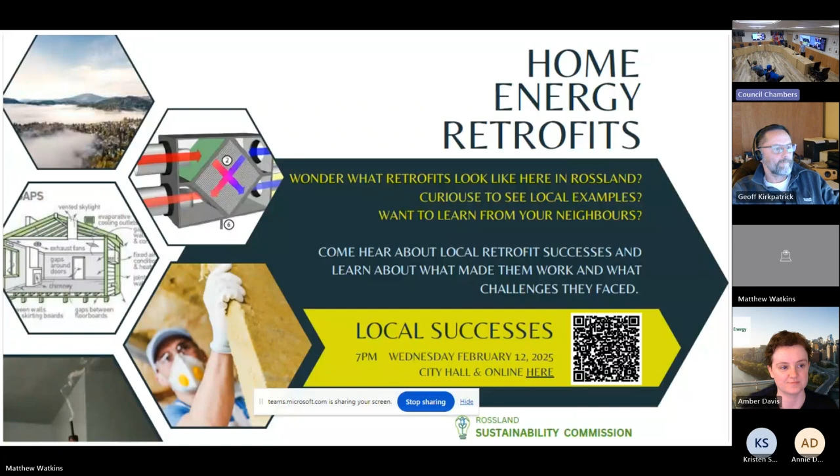I just wanted to acknowledge that we're holding tonight's event on the unceded territories of the Sinixt people. This is something I did recently, a Coursera course called Indigenous Canada. I think it's like an 8-hour course, with a bunch of videos and reading content. I found it a great way to familiarize myself with the issues and help me be a better citizen towards reconciliation. So something to consider if you have some time.

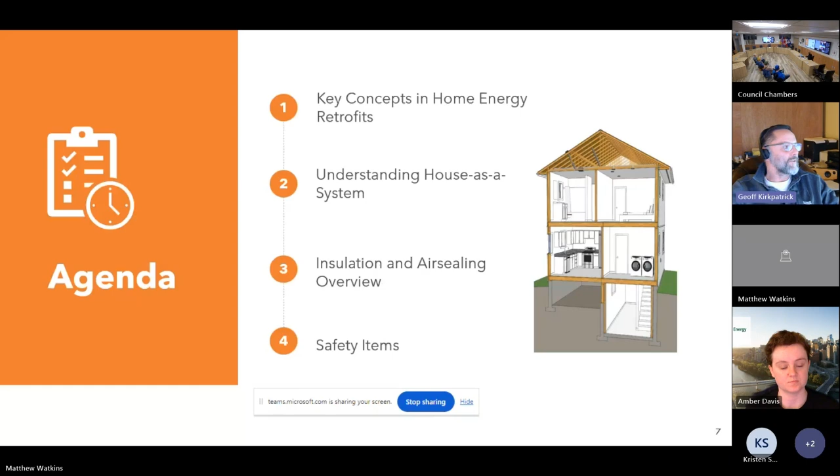So just a recap on Red's previous presentations, and the importance of the concepts of home energy retrofit. The initiatives would be making the home more thermally efficient and airtight, reducing energy consumption and cost, improving thermal comfort and indoor air quality, and avoiding issues due to retrofits that don't utilize the house as a system. The goal is to improve durability, comfort, and life cost performance. This can be a very sensitive aspect when dealing with a residential home and making adjustments. Rossland has a unique diversity in home construction and timeline, which creates quite a number of complex considerations when looking at the entirety of the envelope of the environmental separation.

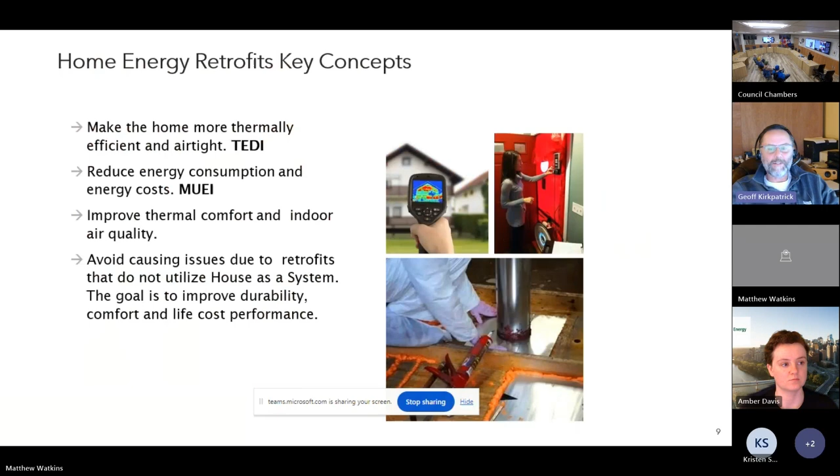I'm just going to cover quickly some of the terminology we're referring to tonight. Building envelope, which is environmental separation, the parts of the building that separate inside conditioned space from outdoor space. That is the critical envelope, and we look at that as a six-sided box. Thermal insulation and R value are materials that resist heat flow, therefore insulating the building, typically measured in R value, with a higher R value meaning more insulation. We're going to delve into that a little bit more.

Air leakage is the uncontrolled airflow through the building envelope through cracks and unintended openings, which is not your known vents, such as dryer, bathroom vents, range fans. Air tightness and air barrier are a combination of materials and components that together control airflow through the building envelope, and I'm going to touch on that in a little more detail. Air sealing, which we've had lots of experience with, is products, tools, and labor intended to reduce air leakage through the building envelope and improve air tightness, air barrier, which is a critical function of our envelope.

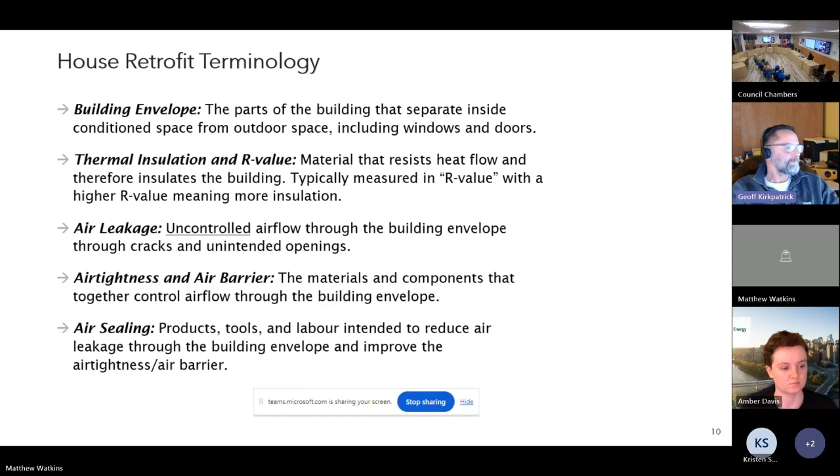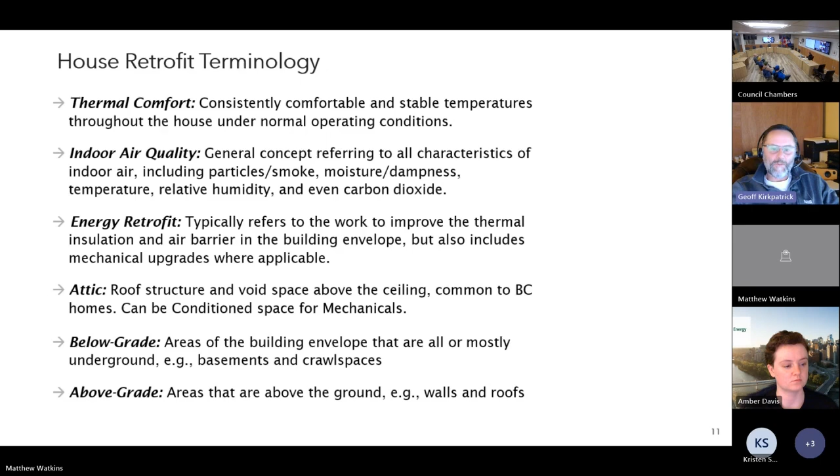Thermal comfort: consistently comfortable and stable temperatures throughout the house under normal operating conditions. Indoor air quality, which for me is a major subject for anybody in an enclosure in a conditioned space. Energy retrofit typically refers to the work to improve the thermal insulation and air barrier in the building envelope, but also includes mechanical upgrades where applicable. An attic is a roof structure and void space above the ceiling, common to BC homes, and can be a conditioned space for mechanicals. This is a critical option in upgrading our homes, that we can convert those areas to conditioned space. Below grade are the areas of the building that are mostly underground, examples are basements and crawl spaces. Above grade are areas above the ground, examples are walls and roofs.

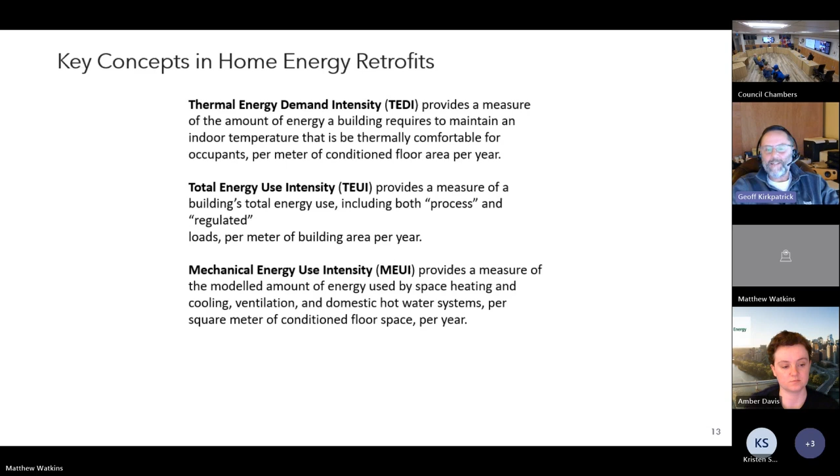So the building envelope, I'm sure we've covered this many times over, but it's really critical. I cover this daily in every interview I go to, and what's caught my attention is how much I have to rehash this information with contractors. All windows, walls, and foundations require the 5 critical barriers.

The primary barriers we're concerned with right now are my air and thermal insulation—those are my TEDI values. In this diagram we're looking at, we can see a standard, say, 2x4 wall cavity. My drywall layer is on the inside. My air barrier and my vapor retarder are one and the same—that is the poly behind the walls.

Now, this would represent a 70s or even 80s building and newer. So anything pre-80s is not going to have an effective air and vapor barrier. That's just the nature of our build process. Anything pre-50s is going to be even less critical in its barriers, and pre-40s, which is pre-building code, is just the Wild West in building enclosure.

But if we want to look at indoor air quality, comfort, and conditioning, all walls for durability require the 5 critical barriers. The water shedding surface is your cladding assembly, meant to keep 90% of the water out of the walls. Your water resistant barrier is the layer of membrane behind that—in an older home that might be felt paper, in a newer home, polyolefin construction wrap—meant to be your final plane of protection against ingress from environmental loads, the outside conditions.

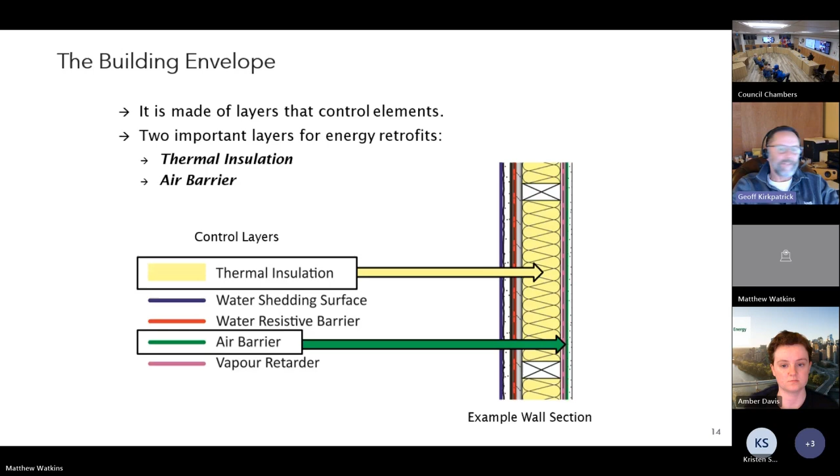To make the house more thermally efficient, our typical scenario would be a high percentage of air leakage and inefficient heating and cooling, so I need a large mechanical means to compensate for the amount of air leakage and the low thermal performance value of my wall assembly. An improved scenario means reducing the ACH, or air changes per hour, and adding insulation where possible.

And I'm reducing that mechanical needs to some degree. An excellent envelope is a good air barrier and extra insulation, which I always refer to as the sweater and windbreaker. Everything in nature puts the control layers on the outside. You and I got up this morning, put our control layers on the outside, and we go outside. We put the sweater and windbreaker on to protect ourselves. Well, our buildings can respond from the same treatment with excellent results.

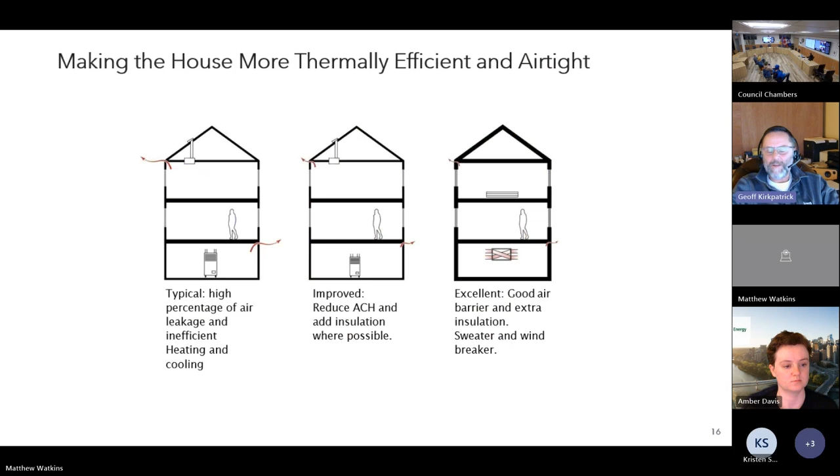So in this case, I've reduced my air leakage. I've reduced my conductive loss. I have very small mechanical needs, and I have an HRV to give me my fresh air resources for indoor air quality.

So air leakage is important in both seasons. We're losing heat energy through our homes through radiative, convective, and conduction. The conductive losses throughout the home are quite prevalent. I can see that clearly when I go into a home with the thermal camera, and I can see all your stud and framing work. That's a conductive loss. Convective loss is all the air leakage in through the top plates, sill plates, penetrations around the building enclosure, and the radiative through window openings.

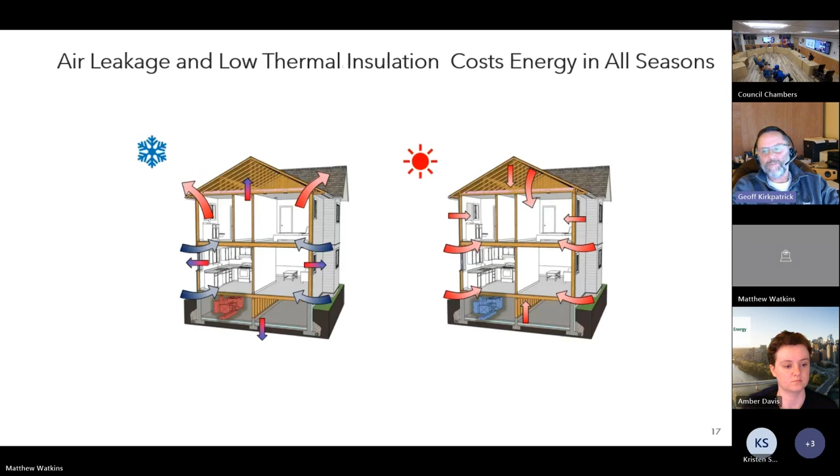The same conditioning is happening in the summertime. We require that durable thermal envelope in order to protect us from overheating in the summertime.

So just for those that don't know, measuring air tightness is done with the blower door. A quantitative air tightness measurement is a useful starting point to get a number in ACH, changes per hour. It's utilized by a calibrated blower door fan, which is used to pressurize or depressurize the building and measure the air tightness.

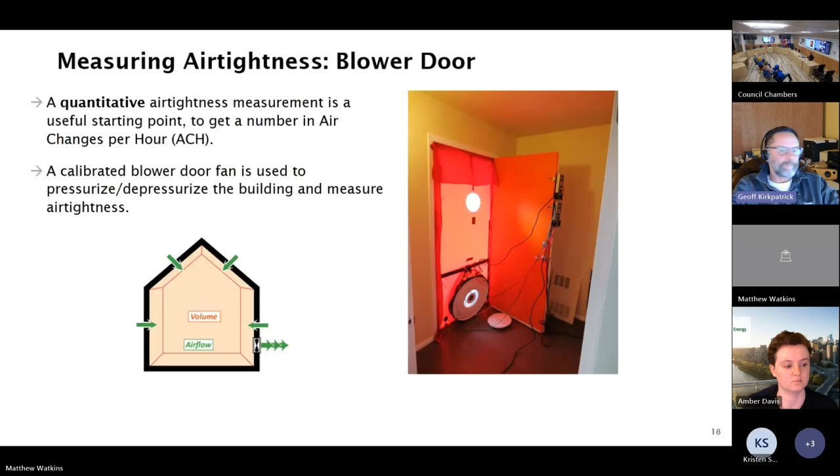So the ACH number indicates the volume of air that can be blown through the envelope under standard test conditions. The high test point that we start at is negative 50 pascals, which would be the equivalent of a 40-kilometer wind blowing on the building. So on the face that is windward to the wind, it's going to pressurize that side of the building, but as the wind eddies over the building, it's going to depressurize the opposite side.

So a 10 ACH building, let's say I have 20,000 cubic feet of interior volume of space. At a 40-kilometer wind event, that means I'm trying to condition or maintain the conditioning of 200,000 cubic feet of air per hour. So for ACH, lower is better. If we can lower our ACH rating, we're reducing that amount of required conditioning, or the BTU energy to maintain the conditioning within that space.

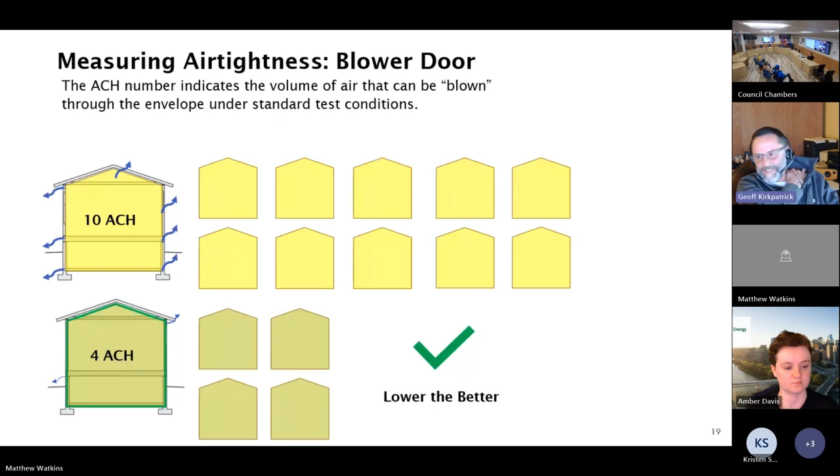Now, it's important to note that two houses side by side with the same ACH rating are not comparative values. It is a relationship between volume. So if you have two houses side by side and you're comparing ACH values, and it's a 2,000 square foot footprint versus a 3,000 square foot footprint, they are not the same ratio of number. It's in relationship to the volume of the space.

So here, before work begins, the house is a system. This is now the critical part of the conversation. By default, older homes may not be very energy efficient, but they usually have built-in risk mitigation. So all of our existing stock homes, a 2x4 or 2x6 standard infill insulated framed wall, has high potential for condensation on the sheathing plane throughout the winter months.

So any air leakage, a pressure differential between interior and exterior, the laws of physics state that pressure wants to equate and temperature wants to equate. So we always have a little bit more pressure on the inside opposed to outside. Air pressure is always looking for those openings.

We hyper-focus on the vapor barrier, but the vapor barrier is a function of coverage. The air barrier is a function of continuity. So if I don't have that continuity in an air barrier plane, whether that's the airtight drywall or through control layers within the wall assembly, I now have a high potential at all those leak locations for wetting or even frosting, generally frosting in our environment here in the Kootenays, within our wall assemblies.

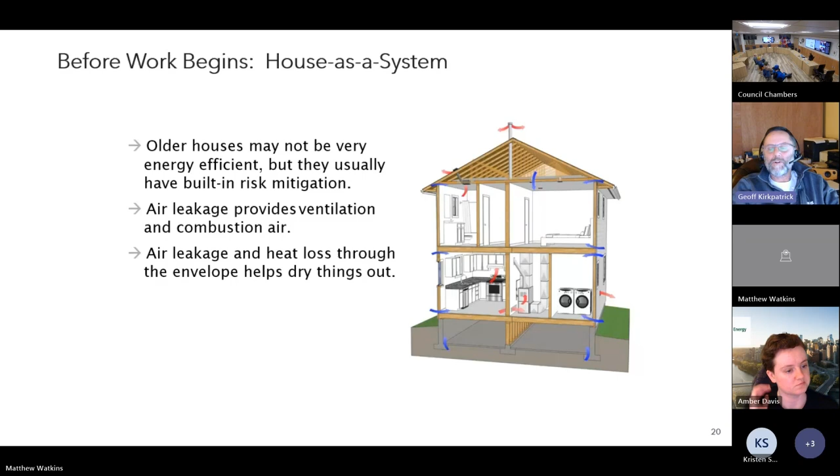Everything should be considered during retrofit work. We want to have good data to base it on. I want to make sure my foundation's stable, worthy of investing the time and money and effort in, which is the structure. I want to make sure the mechanical equipment, the electrical, is it going to meet my needs? If I do make changes to the building, is mechanical going to happen first or second?

And occupants and operation. I see a dramatic change in the operation of a building depending on occupant loading. If we go from an older couple that sold off the home and a young couple moves in with a couple of kids, and we change that occupant load behaviors, it has a dramatic effect on the interior conditioning environment. Energy upgrades do not occur in isolation and may affect several building components, and if not planned well, they can lead to issues in the house.

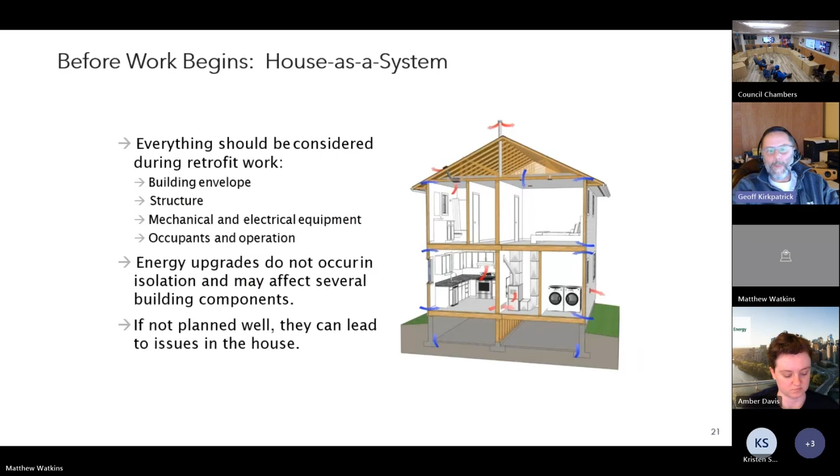And combustion spillage. So again, we're in these homes where by default we had been using a considerable amount of fossil fuel energy or combustion appliances, and we start trying to air seal and reduce the ACH metric. We have a condition that creates that combustion spillage where we create draw to the inside of the building. Air sealing can lead to poor air quality if good home ventilation is not provided, and improper retrofit work can trap moisture and potentially degrade the structure.

A scenario I've recently had was a replacement of all new windows, and those windows, as we can see in that photo in the bottom, started condensating quite excessively. The homeowner assumed that there was something wrong with the window installation, and upon review, the mechanical hadn't hooked up the fresh air return to the furnace, which was just recirculating the interior air and getting excessively high condensation rates within the building. So their RH was well over 70%.

It crept up on them unbeknownst, and that was the issue: now my dew point is so high at 70% and 20 degrees. My dew point is like 15 degrees, so it's gonna condensate on the lowest R value component within that wall assembly. So something as simple as a mechanical not being properly installed was enough to cause condensation in a newer home.

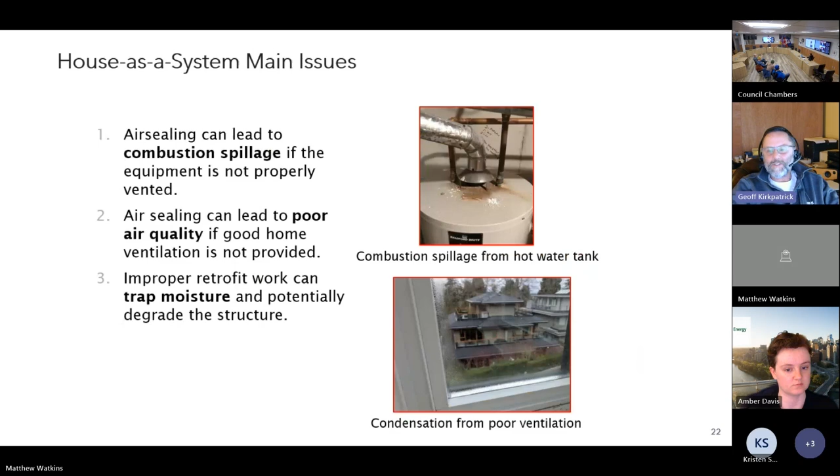So just a visual aspect to show that in an existing building, air leakage provides a lot of that combustion air. And as somebody who goes around with a thermal camera and has reviewed everything from an 1870s building to a 2025 building, we can visibly see these locations of air leakage. So anything pre-70s, you're going to have a fairly high ACH rating, and most of that fresh air that you're consuming on the inside of the building is actually coming through the walls.

In wintertime conditions, when all the windows and doors are closed, your fresh air intake without dedicated intake is coming through your walls and gaps at foundation to floor or ceiling plane. So in this case, we've existed in that natural balance: the building's leaky enough, there's enough air coming and going through the envelope that I'm not at risk of combustion spillage.

But as we move to the right with a little bit of air sealing, I'm going to have a potential that when I run the exfiltration components, my bath fans, range fans, and dryer is a big one, sucks a lot of air out of the space. If my envelope is more efficiently sealed, there's a probability of drawing that combustion gas back into the space. So one of the more typical is your gas hot water tank.

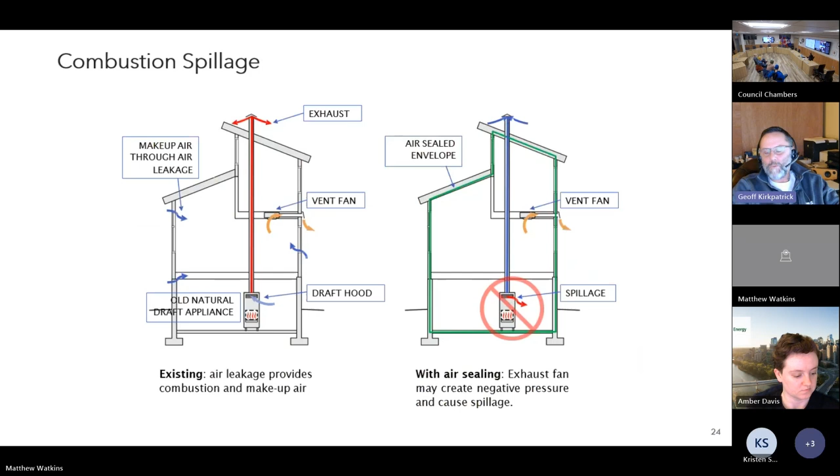And if you look on the top, there's a raised hood above the combustion exhaust. And that is an area where if you were to turn on all of those components at once, if you had people occupying the bathrooms with the bath fans on and the dryer was on and the range fan was on all at the same time, and I can raise the interior pressure differential by more than 5 pascals, I'm at a risk of combustion spillage.

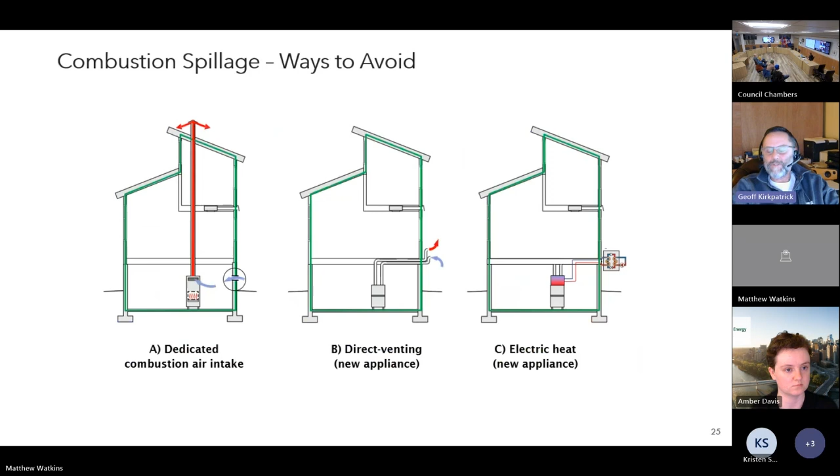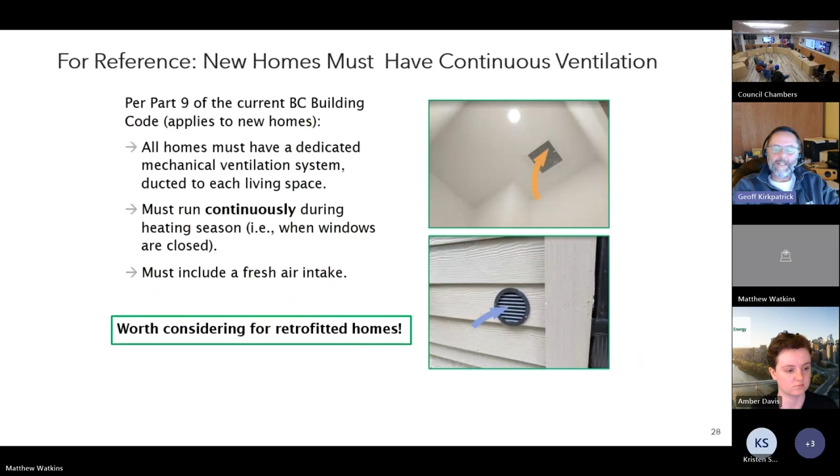It's definitely worth considering for retrofit homes. So this is an example we're going to run through of average R value. It's a critical exercise in understanding the changes we make to the building and the potential offsetting of costs, but also the effectiveness of those opportunities.

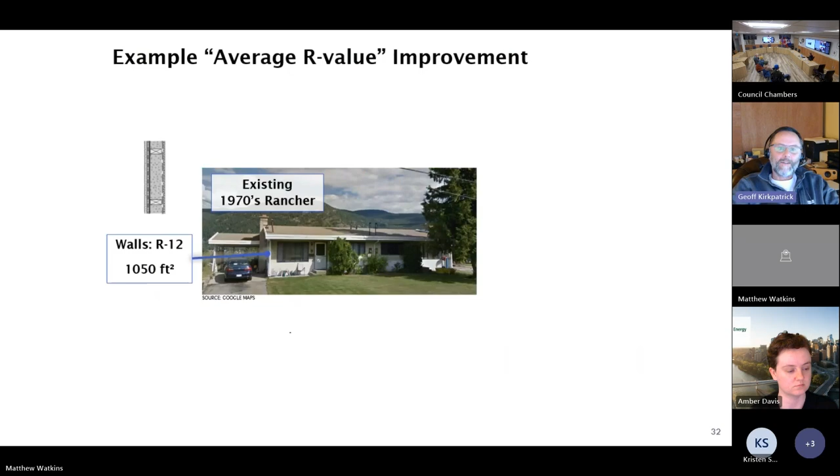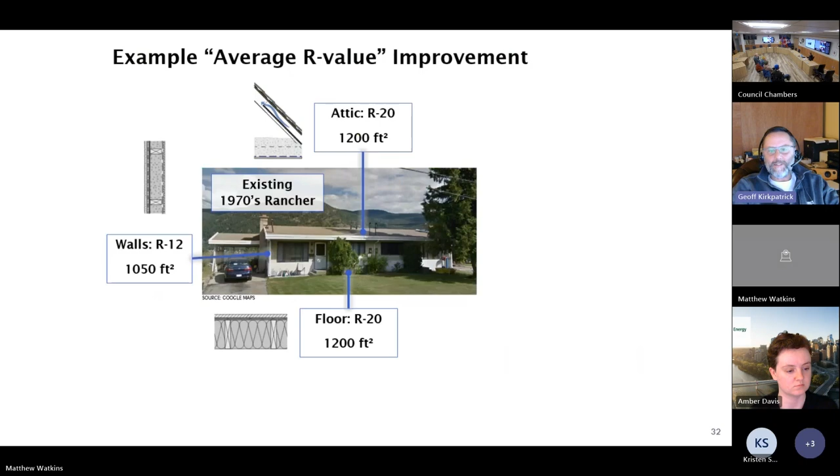The example here is an existing 1970s rancher. My walls are an R12 kraft batt, with 1,050 square feet of exterior wall. Our attics are R20 at about 1,200 square feet. My floor is R20 over crawl space at the same 1,200 square feet. And my windows are single glazed aluminum framed, with an R1 being generous in this case, occupying 125 square feet of that exterior envelope.

So my average weighted R value for that envelope is 10.8. This is referred to as your UA, or your U value over your envelope, as an average weighted value. Obviously my windows are a different R value than my walls. So if I take all of those components together, the window-to-wall ratio, the wall component, the R value of the wall, I get a UA value in this case of R10.8.

The windows make up 3% of that envelope, but because of their low R value, they make up 38% of the heat flow through that envelope.

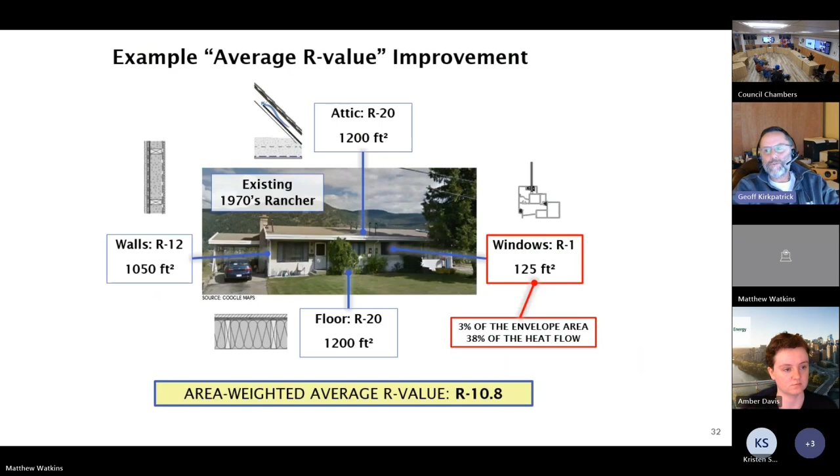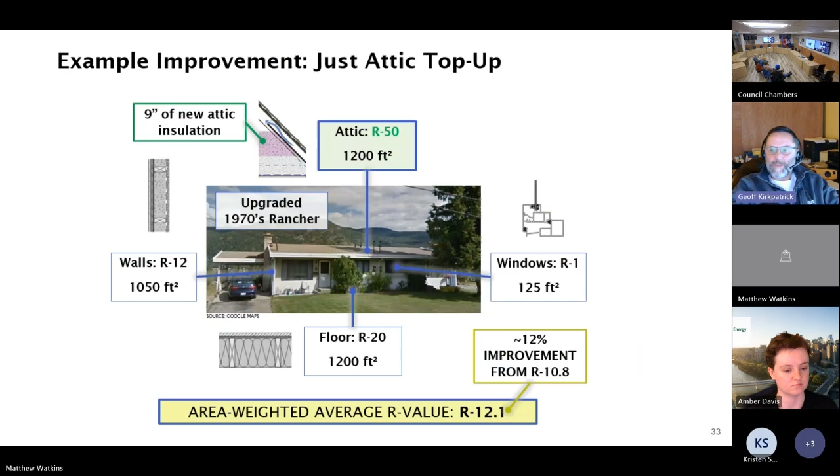So if I was to add 9 inches of new attic insulation, turning my attic to R50, that gives me a 12% improvement of the overall R value of the building, to R12.

If I upgrade my windows to an R4 Energy Star standard window, that gives me a 39% improvement, to R15 for the UA value of the envelope.

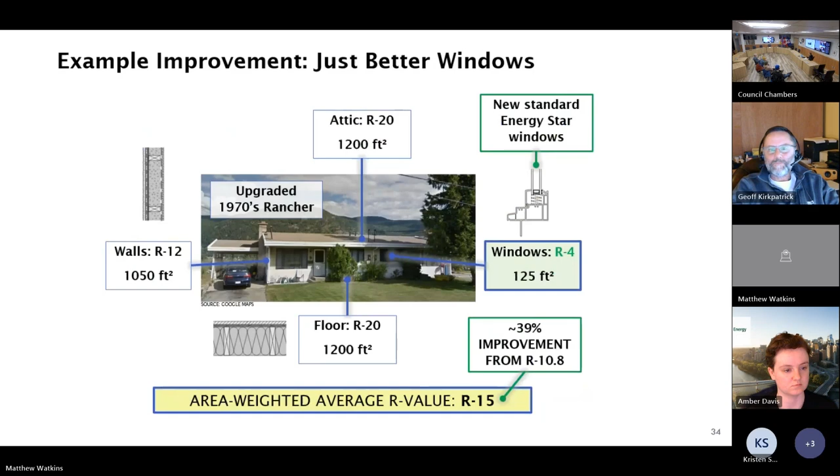Now, if I just put in 6 inches of new attic insulation at R40 and the new windows, I get a 58% improvement from my previous R10 to R17. Not bad value if I need to get the place to a comfortable space. This is the first step in upgrading that envelope.

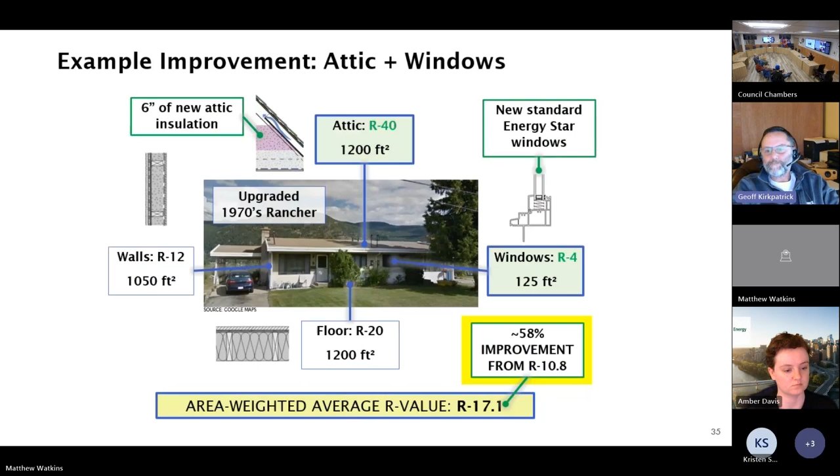So adding insulation to an opaque assembly, even R30 of new insulation, had a relatively small impact at 12%, but improving the windows from R1 standard to R4 had a significant impact on the average R. Combining upgrades, even with less attic insulation, had the biggest impact at 58%. And the concept applies to all assemblies, combinations of envelope improvements.

Windows and doors are always a good starting point if possible, and upgrading them provides other value like comfort and air tightness. Talk to Amber, you can learn more.

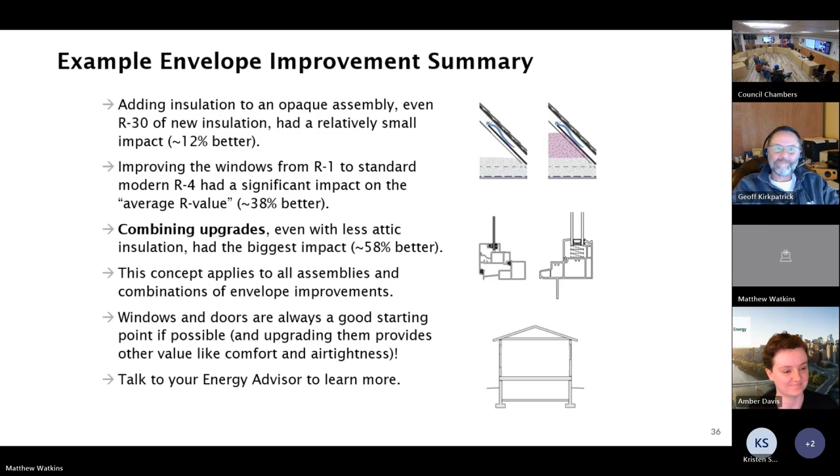So here's some current scenarios that I'm seeing, and I'll leave some room for Amber to talk about success stories. Unfortunately, with our current state at the contractor level, we have some great contractors and we have a pool of less experienced or less capable contractors. We're going to get that in any marketplace. It's critical to understand the function of your specific product and being able to navigate the upgrades effectively.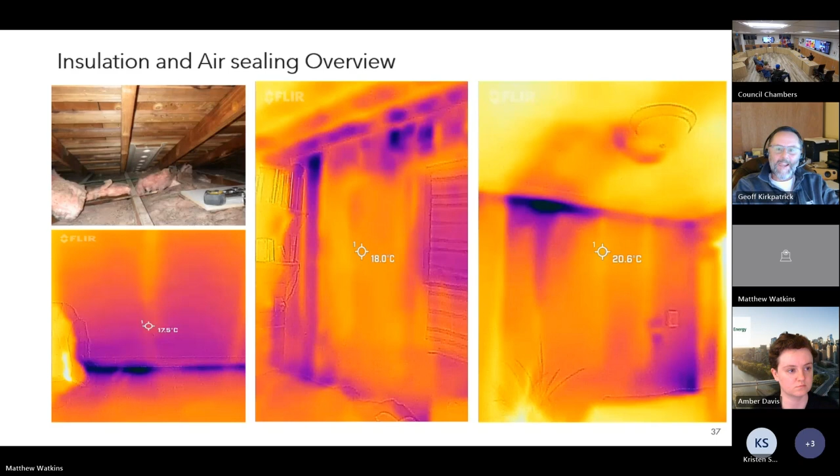So we can see here on the left another case scenario, which I think is very interesting and important to highlight: in the top left, just beside the focal point, is an interior beam where a wall was removed, but I have air leakage from the exterior wall into that beam channel. That means air can now track through my interior walls, which makes it very difficult to complete an interior air barrier approach referred to as an airtight drywall approach, with drywall being the most consistent finish within the home.

So I can utilize that consistent plane by finishing it out and sealing penetrations, sealing the drywall to the floors, ensuring that it's sealed to the window and door penetrations, and pick up some air tightness metrics based on the airtight drywall approach. But unfortunately, I have no control of the air that's moving through all my intermediate walls within the building.

Another one here on the right, which is not as uncommon as I expected: this is wood fiber infill insulation left over from the mills, so you barely have an R4 ceiling plane. This is a current condition in areas like Rossland, where we have historically poor building practices. Our needs weren't as critical as they are in today's environment, so this was a normal, acceptable practice.

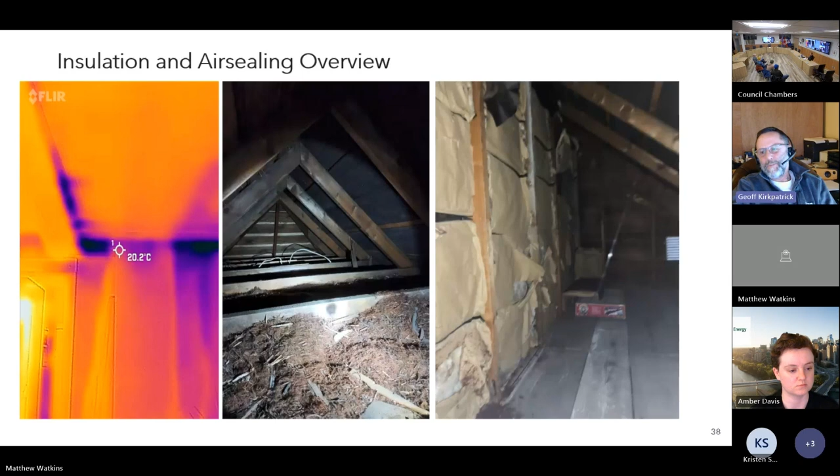Go ahead, Brad. So this is too fast.

Thanks, Brad. On the left is a newly installed Energy Star door, not tied into the critical barriers of the building. This is going to be the big theme for me: the critical continuity of that air barrier assembly. If I don't have an air barrier assembly, it is mandated - CSA A440, BC Building Code, Best Practices Guide - and it's repeatedly highlighted in the HPCN contractor vetting process that you must maintain contact with the critical barriers. If there are no critical barriers within the wall assembly, such as in an older home with no poly or no water resistant barrier on the outside, you are to install the window so that you can tie into those critical barriers if subsequent work was to be done. This is the requirement of a contractor to install to CSA A440 standards.

In this case, here's a new Energy Star door that is simply spray foamed into the opening, and I've got tons of air leakage around the frame - not the hardware or door itself. This is outside of the frame-to-jamb tie-in, which was just done with spray foam. Spray foam is not a continuity tie-in between components.

I'll just dive into that one a little bit. Spray foam itself has a long-term thermal resistance loss value - it doesn't maintain its R-value over time. It also doesn't rack with the building.

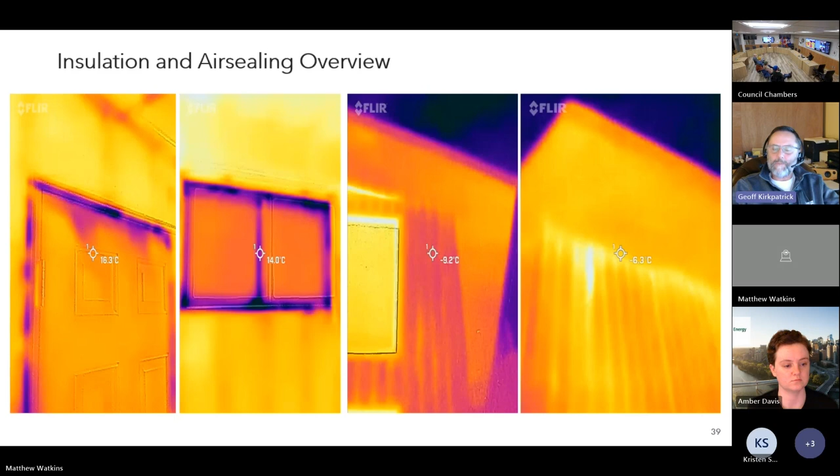It is currently at 1.75 for this space, and I'm planning to go beyond passive levels if I can, reducing my air change rate metric to about 0.5 air changes or less. I've built in the past to 0.012 air changes, where the only heat source was recovery through a heat recovery ventilator from the battery storage room for the solar on a remote cabin. That was the only heating source in the middle of winter for that building. So dramatic effects can be made with the envelope-first approach.

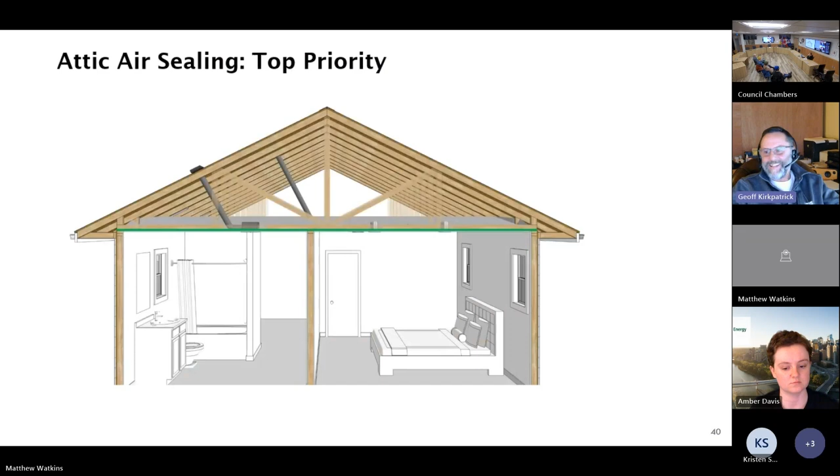We can see from this plan that we have a ton of penetrations within our ceiling plane. We have duct chases, bathroom fans, range fans, pot lights, and lots of penetrations within our framing assembly as well, including wire chases and plumbing chases going down through common wet walls and electrical feed walls from your panel all the way to the second or third story. So there are lots of opportunities in the ceiling plane, which is sort of the final cap.

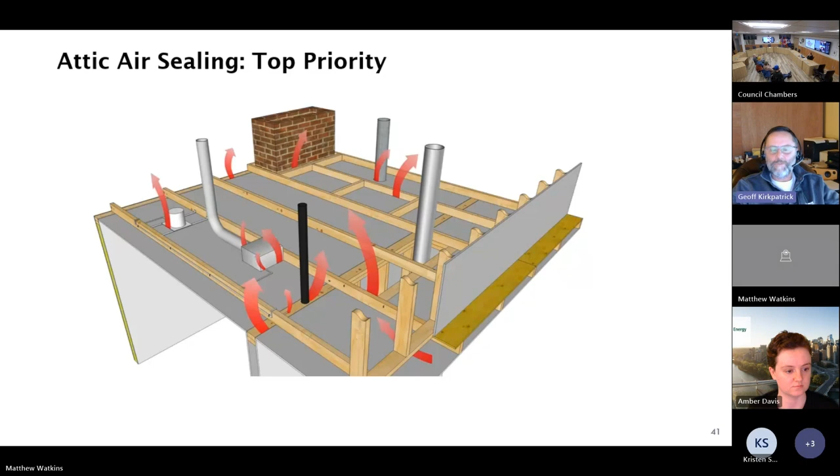If I can get that ceiling plane air sealed, in a retrofit application I'm not simply adding insulation to the space. You'll hear in the industry that adding insulation improves air tightness, but from a building science point, that's not a good enough answer for me. I would actually go in there and pull the insulation back in these areas. We have some videos, and it's described in all the publications referred to earlier in the slide deck, on how to air seal all of these penetrations. It's really quite simple, not difficult at all—even a homeowner can take this on themselves and make a dramatic improvement on losses through the building envelope.

Attic hatches are the elephant in the room. It is considered a door—a critical opening in your envelope—and we generally just have a piece of drywall or plywood up there. It is a door. It requires insulation, an air sealing gasket, clasps to create compression on those gaskets, and continuity in the insulation layer above. Critical.

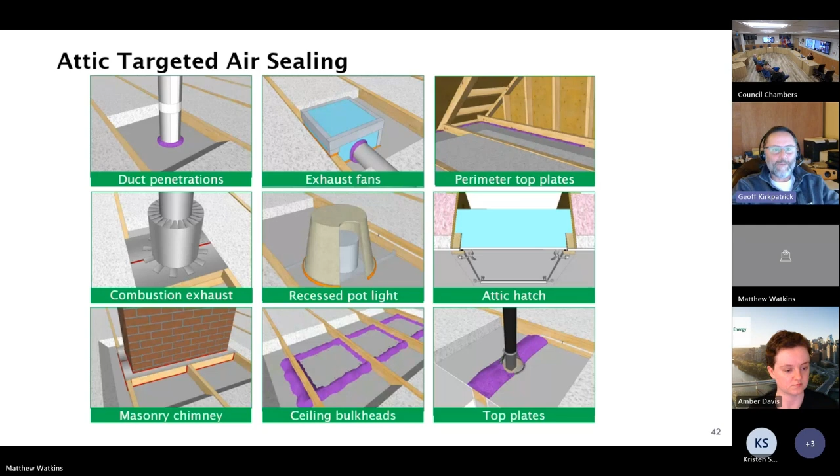Some safety issues: asbestos. We're seeing a lot of asbestos and vermiculite in homes in Rossland, which is very common. That means I can't do a blower door test by NRCan standards. There are still old ducting pipes, and the fabric tapes you'll see on the ducting are asbestos tape and need to be remediated. You can use a liquid duct seal and paint it over those components if there are just a couple of areas you want to seal up, but generally it requires a complete environmental assessment if doing any major work—any disturbance of those components requires an environmental assessment.

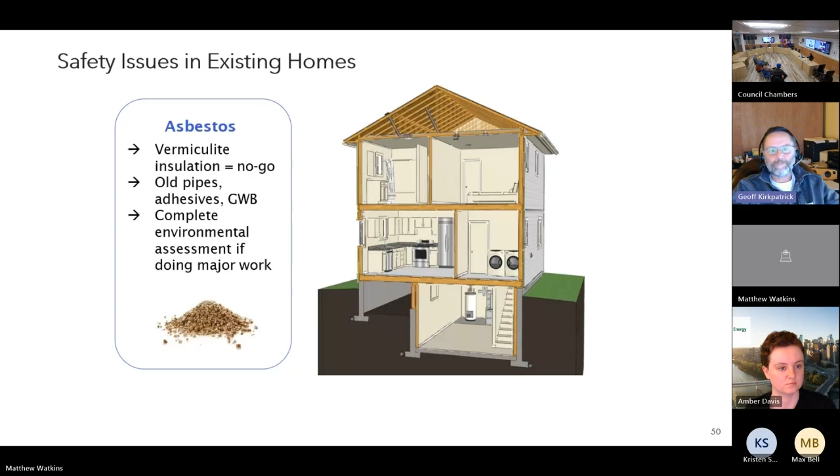A family of four can produce 4 to 6 liters of water in the air per day. All of that rises against the ceiling plane, and air leakage up into that cavity is going to condense on the underside of the decking. I've seen some pretty black and moldy attics lately.

Not an ideal situation. Severe mold growth should be addressed, and ventilation is a critical component to that. Avoid prolonged exposure to mold, you'll get flu-like symptoms. We used to call it restorator's flu back in the day when we did a lot of leaky condo restoration. I spent 30 years in leaky condo remediation. Now, because of my sensitivity from overexposure, when I walk into a home with mold I can tell right away. I get an itchy, scratchy throat and an allergic reaction, an itchiness in the nose. If I stay in that environment, I'm susceptible to getting restorator's flu, caused by basidiomycete molds in the air that affect our mucous membranes. So it's critical to ensure we're not in a scenario of prolonged wetting, because that's the food source for fungal growth.

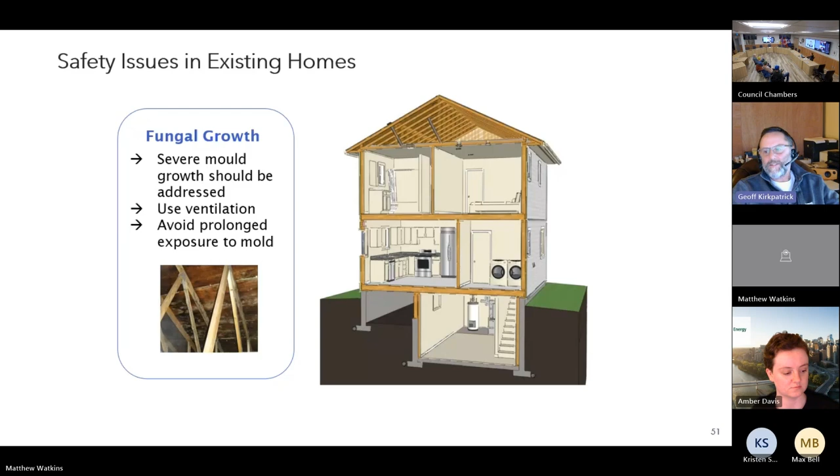Gas safety and combustion: we do a combustion safety test when you have gas appliances, under the blower door effect, providing a combustion spillage test. I want to find out if I can raise that Pascal limit above 5 to see if you're at risk of combustion spillage.

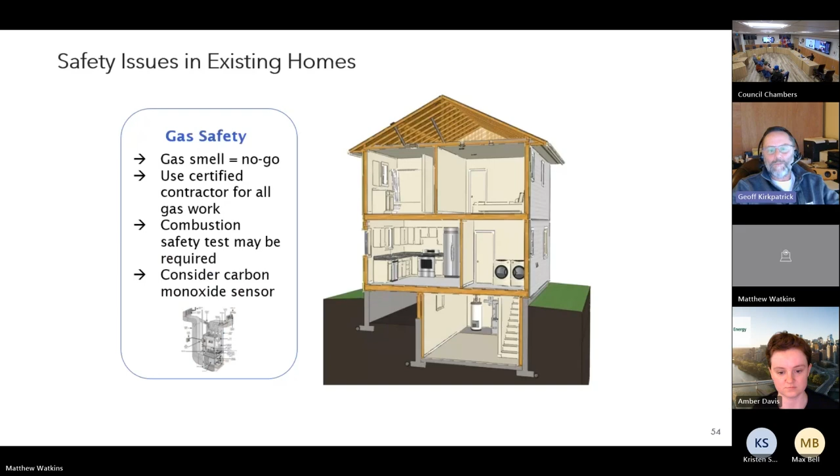So, summary: reasons why retrofit your home include improving comfort, increasing energy efficiency, improving indoor air quality, eliminating fossil fuels, and increasing home value. This is a very important consideration as we continue to improve.

Kootenays adopt energy step code. New metrics going forward mean that all new homes are built to 1 air change or less, with R50 in attics, R30 in walls, and R30 in foundations. So there will be a massive disparity between new and existing housing stock as we progress into the future.

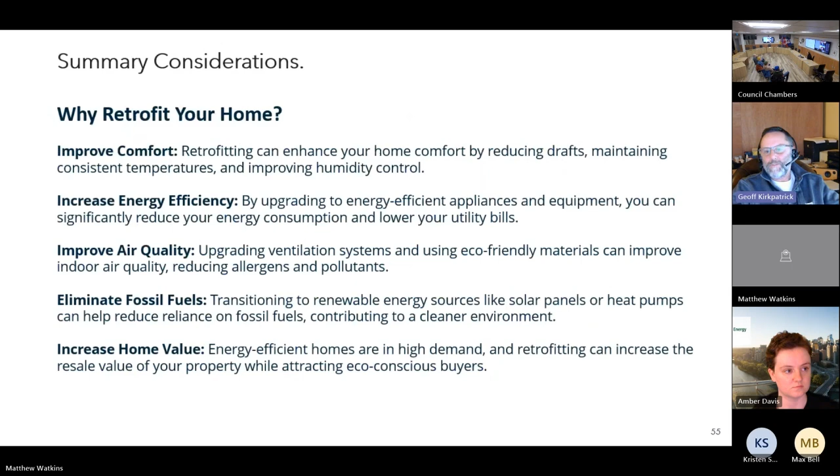What triggered my need to do my own home was not just to improve comfort within, but also to improve the longevity of the building and the resale value. I want to protect my investment long into the future, so I'm starting with the envelope-first approach. I think that's it for slides, Red.

One other critical point, most importantly out of all of this, I've included this literature in the PowerPoint because it's what's on every renovation upgrade report for the instructions required to meet requirements. The first critical component is ensuring that the components you are potentially purchasing are on Energuide's searchable database. What seems to be happening is people aren't scrolling all the way to the bottom to see whether it's a current listing or not. I just had a scenario with 33 new windows, over $40,000, and only 3 windows qualified under the program because they didn't scroll to the bottom and see it was a delisted product.

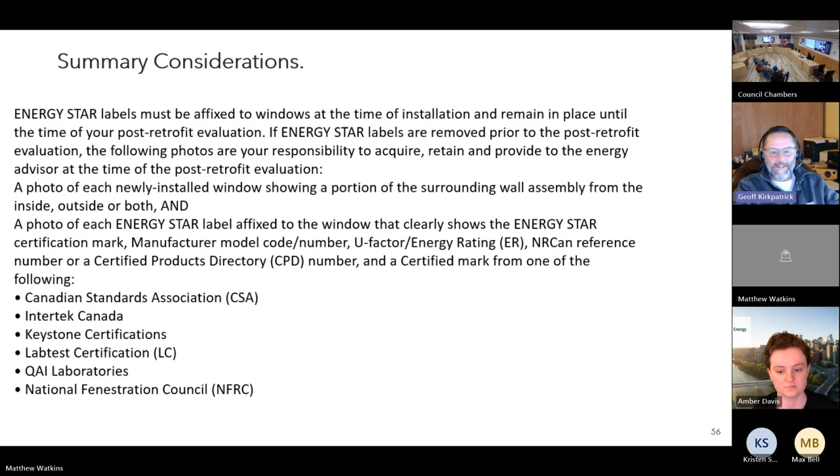One other thing I'll touch on: CHBA has on their website something called 'Getting It in Writing.' It helps you understand the contract requirements for a retrofit, giving guidance on the verbiage and dialogue to include in that contract. If you're hiring a window contractor, ensure that the product they're providing meets the requirements, because there have been far too many cases where we do a post-inspection and the windows don't qualify. So it's critical, if you're leaving it to your contractor, to get that information and make sure it's in writing that they must meet the criteria.

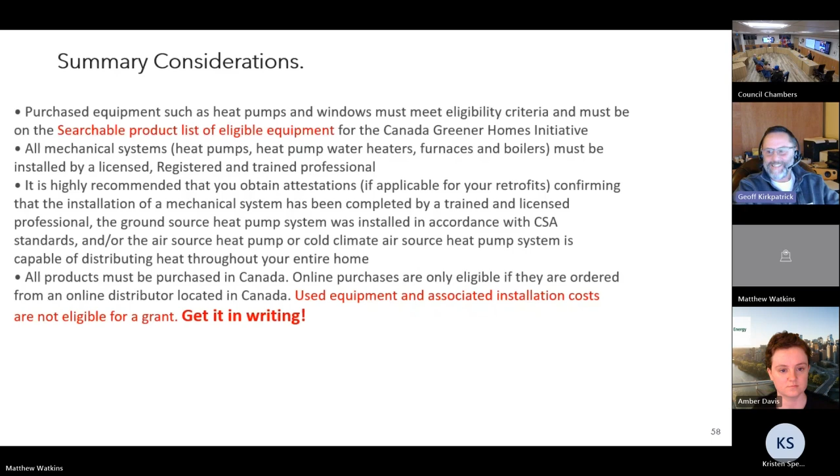So it's always an excellent resource—if you're doing any negotiation, whether mechanical, envelope, or any component of your windows or building—to get it in writing and cover yourself, because nothing's worse than not meeting the requirements of the programs.

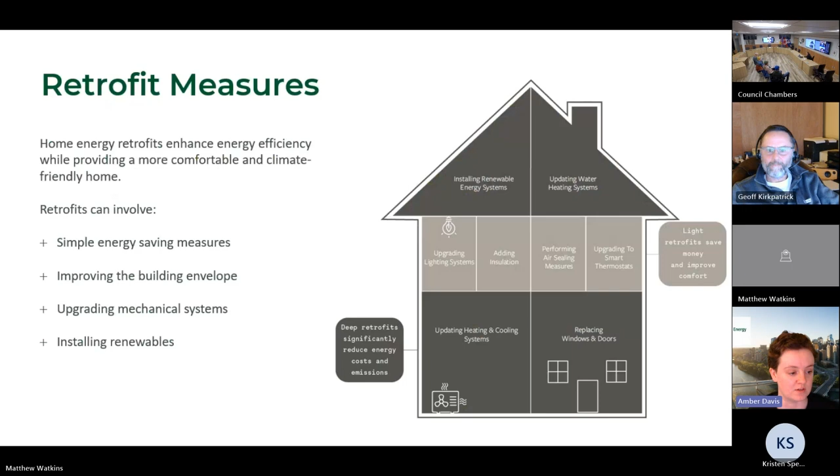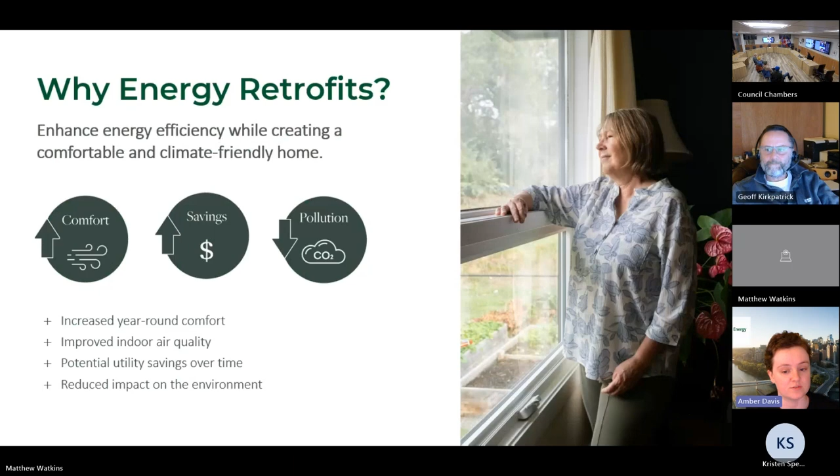Next slide, please. Again, why do we want to do this? We want to increase our comfort levels in our home. We want to be warm in the winter and cool in the summer. We want to have a healthy home where you're getting fresh air and stale air with toxins are being removed. We hope to see our utility bills reduce, allowing us to save over time, and we will also have reduced our impact on the environment. Canada's homes and buildings account for around 18% of national greenhouse gas emissions, so retrofitting has a key role to play in reducing this percentage.

So Retrofit Assist, essentially, we're a retrofit concierge program. The whole purpose of Retrofit Assist is to support you with your retrofits from start to finish. We can help you organise an EnerGuide evaluation with Geoff, help you prioritise which upgrades you want to move forward with, connect you with local qualified contractors, and then also support you through the rebate process as well. So we will support you basically as much or as little as you need to achieve your retrofit goals.

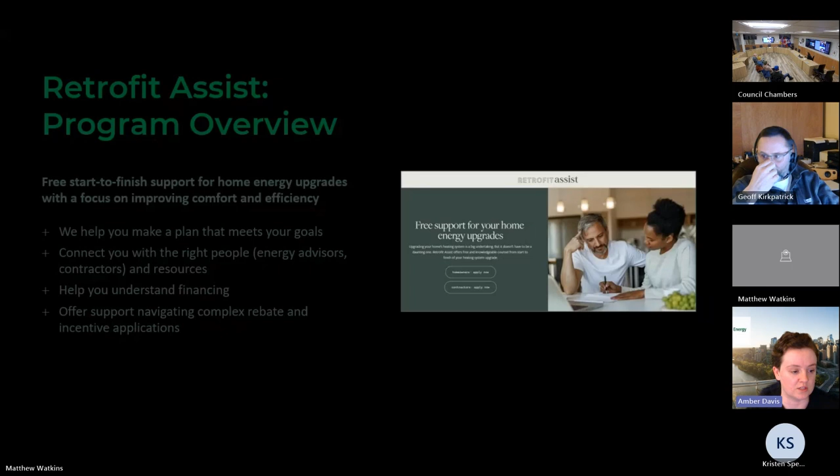Okay, so I could go on for the homeowner journey for ages, so let me try and squeeze it into a short version. The first step is for a homeowner or renter to apply for the program through our website or over the phone. Once applied, they'll be able to schedule an onboarding call with us, where we'll discuss foundational information such as basic information about their home, their immediate priorities and goals, and their need for support.

We then require that the participant proceeds with scheduling an EnerGuide evaluation on their home, and this is just so that the participant and us have all the necessary information about their home in order to make the best retrofit decisions and avoid unintended consequences.

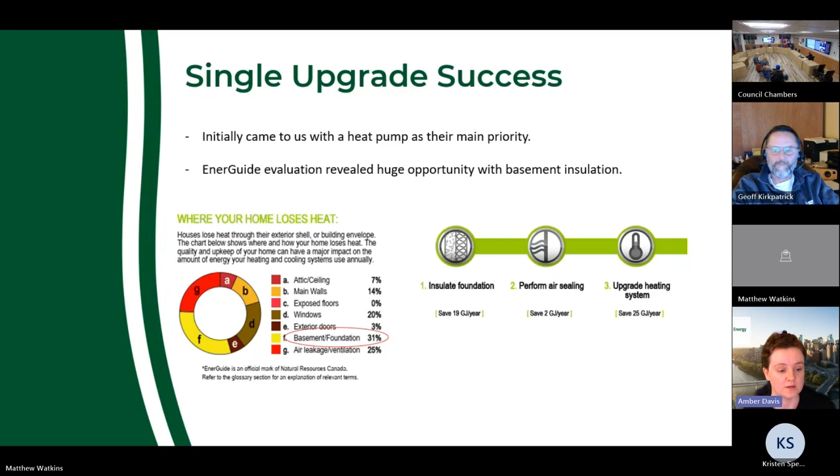Next slide, please. So they reached out and got some quotes from the contractors that we provided, and the quotes for the work were coming in between $6,000 and $7,000. The final invoice with the contractor they chose was for $6,600, and they added R24 to their basement box ends, R20 to their basement walls, and the contractor also installed a vapor barrier on the ground.

What was the impact of this upgrade? We saw a 39% reduction in energy use, the difference in energy use between pre-retrofit and post-retrofit evaluation. Their air leakage rate dropped by 2%, their carbon pollution dropped by almost 60%, and they gained $3,090 in rebates, which covered around 46% of the cost of the upgrade. So you can see that a fairly small, inexpensive measure had a huge effect on their home.

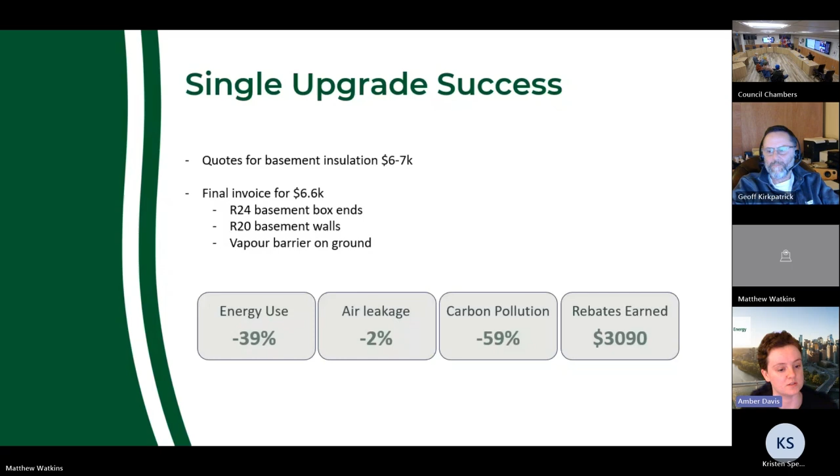And we published a case study on these guys recently. They mentioned going into the winter now that their home is a lot more comfortable, which is fantastic to hear. Okay, next slide, please.

So this homeowner, a similar story, but a different outcome. Again, they came to us just wanting a heat pump. This homeowner started with a higher air leakage rate of around 10.5.

As Geoff mentioned earlier, new builds now are typically built with an ACH of 3 or less. And typically, from what I see with our participants in Rossland, their homes are typically between 6 and 12. Some folks go as high as 17, which is really concerning. But yeah, most people average between that 6 and 12 region.

Why do we want a lower ACH when installing a heat pump? We want to make sure that our home is not as drafty, because it's going to result in a larger unit up front. And ongoing running costs are going to be more expensive because the heat pump's going to have to work harder to replace the heat being lost from the home.

So we really encourage this homeowner to perform some building envelope upgrades ahead of their heat pump installation. We also connected them with some of our technical experts that we work with, but they decided to go ahead with the heat pump installation anyway. So you can see in the pie chart at the top, basement, foundation, and air leakage are the highest causes of heat loss in the home.

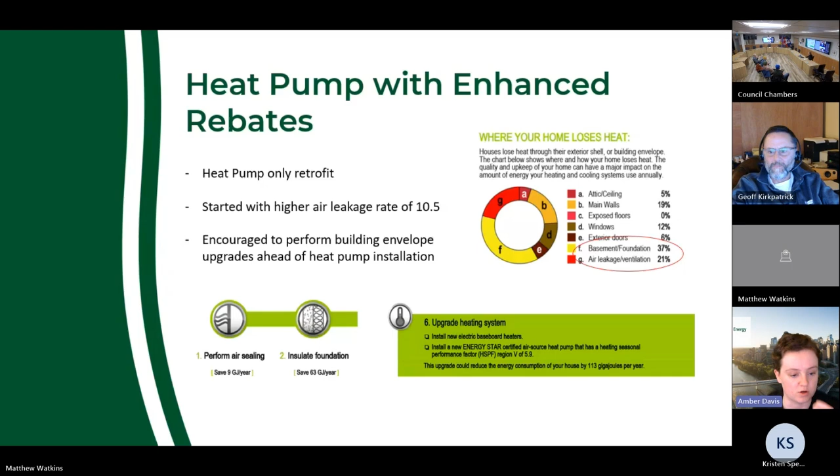Okay, so final invoice for the heat pump upgrade was around $24,500. And this homeowner actually qualified for the Clean BC Energy Savings Program, which is a rebate program that offers enhanced rebates for income qualified individuals. So they qualified under Tier 3, which is the more middle income category, which qualified them for a $10,500 rebate for a heat pump installation. And they also accessed the Canada Greener Homes Grant, which was another $5,000 on top of that.

So the impact of this one, their energy use reduced by 36%, which is great. Now, we actually saw their air leakage rate go up by 7%. We don't exactly know the reasons why, but it's likely due to inadequate sealing of wall penetrations during the heat pump installation. It is something that we do see relatively often, and definitely something to look out for.

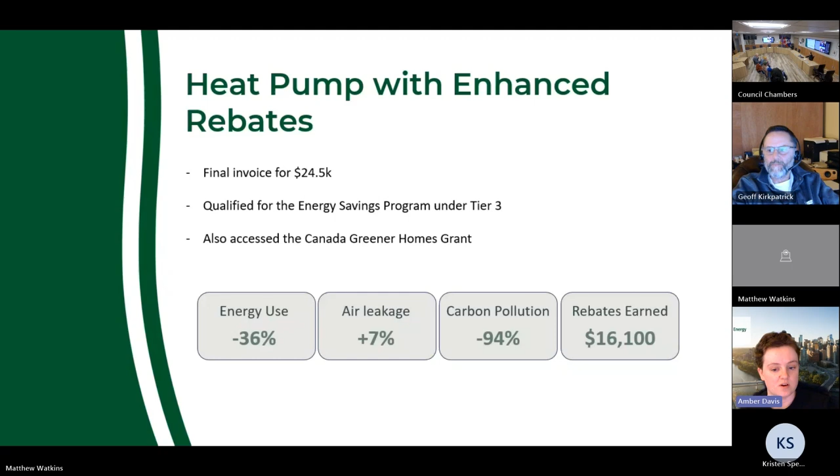Their carbon pollution reduced massively by 94%, which is phenomenal. And that's because they went from gas heating to all electric. And rebate earned $16,100 in total, which covered around 65% of the cost of the upgrade.

Okay, next slide. This one is more multiple upgrades and another income qualified individual. This household, they qualified under the old income qualified program with the province. They refreshed it and made it into the energy savings program. But this household qualified under Tier 1, so the lowest income level.

They came to us wanting to do a heat pump and windows and doors. And they were struggling to work out how to afford the upfront costs and deposits, even with the different rebate and financing programs that are out there. And it's definitely a considerable challenge for folks.

I was speaking with someone today, and their heat pump contractor wanted a 50% deposit upfront. So that's over $10,000. Again, window and door contractors, if you're getting top tier products to qualify for the rebate programs, depending on how many windows you're doing, you could be looking at thousands of dollars in deposits that you have to pay upfront just to get started. So yeah, definitely a challenge for a lot of people.

Looking at their EnerGuide report, you can see on the right at the top in that pie chart: basement, foundation, air leakage, and windows. So they had a few different areas of improvement to choose from, but they felt that windows and the heat pump were the most important upgrades to them. So we supported them with that. Next slide, please.

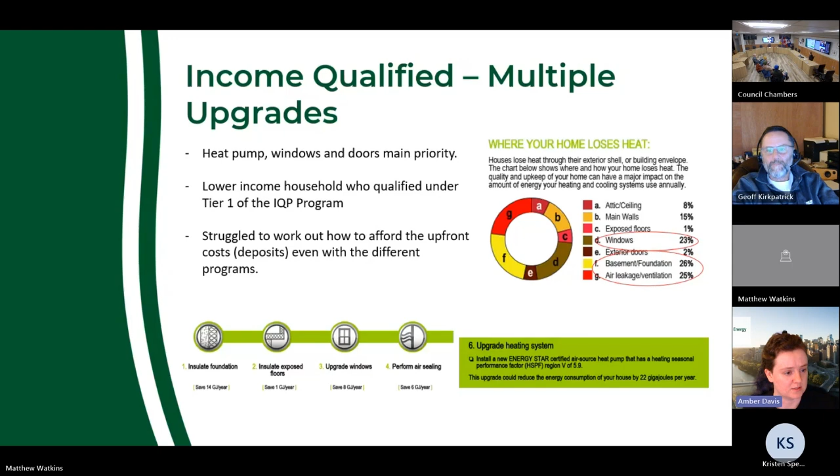Right, so the total retrofit cost for doing, I think it was 9 windows and adding on a heat pump to an existing high efficiency natural gas furnace was $41.8 thousand. So around $14,000 for the heat pump and almost $28,000 for the windows. It might seem like a really high number, but honestly, that's about right.

They used the Canada Greener Homes loan, the Canada Greener Homes grant, and the income qualified program as their sources of rebates and financing. They achieved a 32% reduction in energy use, 13% reduction in air leakage, an 86% reduction in carbon pollution, and gained about $23,650 in rebates, which covered around 56% of the cost of the upgrade.

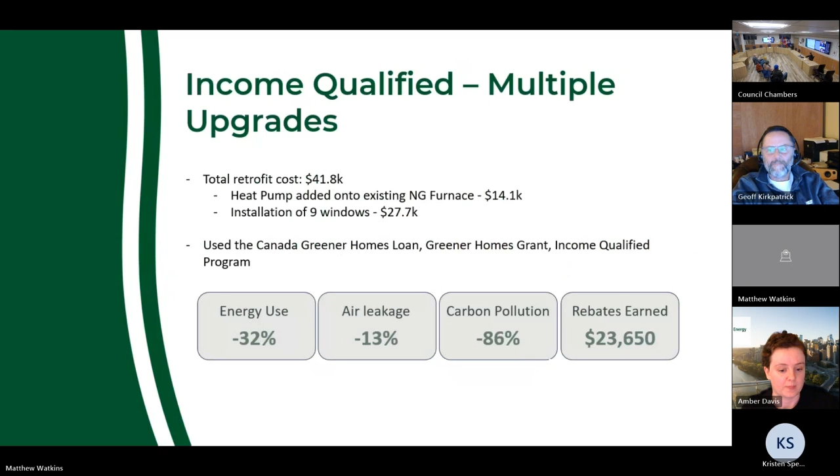Okay, next slide please. So these are just 3 examples of retrofits out of almost 50 people who have now completed their retrofits through our program in Rossland. And what are the most common challenges that homeowners face?

First one is costs. Do you have the funds to cover contractor deposits? As I mentioned, they can be very high and can add up very quickly. What are your funding sources? Are you planning on using your savings, a line of credit? Are you wanting to use the federal loan? Are you wanting to go with our retrofit financing? Making sure that you've got your funding sources lined up and you know which parts you want to dip into is very important.

Do you have an idea of your budget and the realistic costs of the upgrades you want to do, including any unforeseen costs? We've seen people, especially in Rossland, who have gone for window and door replacements, and then rot has been found when they're doing those installations, and it puts the cost of that retrofit installation way up, more than what people could anticipate.

So yeah, it's really important. Obviously we can give you a decent idea of an estimate of what that might come to, or what the general costs are for the different upgrades you're looking for. But it's really important to make sure you have clear expectations of the cost of these different things, and do you have a safety net if these costs go way up?

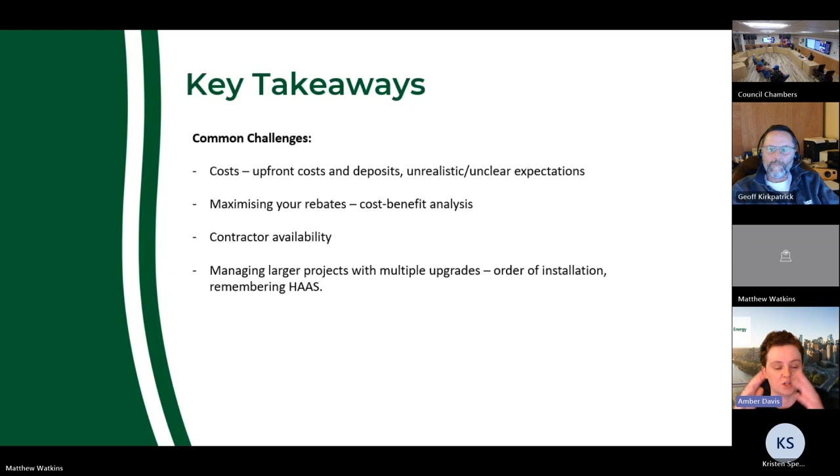Last one, managing larger projects with multiple upgrades. With larger upgrades, the order of installation and the finer details become a lot more important, so remember that your home works as an interactive system. For example, installing new windows and doors, you want to ensure they are adequately sealed into the building envelope so there are no gaps in the air barrier, and that penetrations from heat pump installations are adequately sealed. Typically with large projects like this, if there's a general contractor acting as a project manager of the whole retrofit, it can help ensure those finer details are not overlooked, so you're not ending up with a mismatch of different components coming together but not quite fitting properly. Next slide, please.